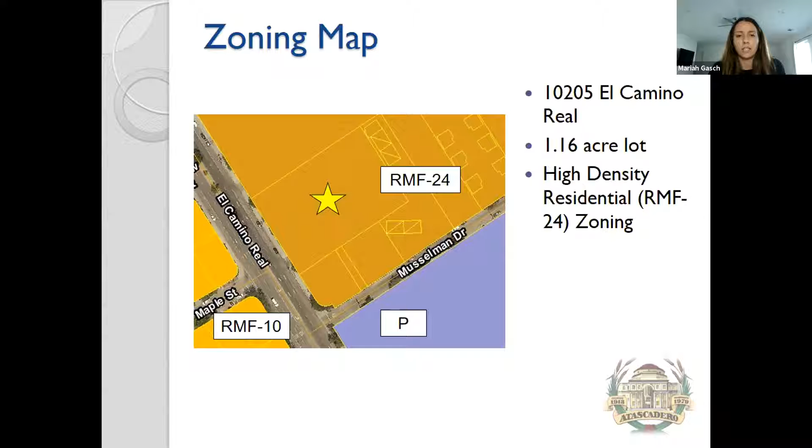Here we have the zoning map. The property is in the residential multifamily 24, or high density residential multifamily zoning district. The property itself is about 1.16 acres, and to the west side along El Camino is the low density multifamily or RMF 10. And then to the south is the public zone, which is actually the state hospital's property, the blue property you see there.

Here's an aerial photo of the site. We'll talk about what's existing in a little bit. You can see that there are 4 existing residential buildings, and then there's 1 community building on that site.

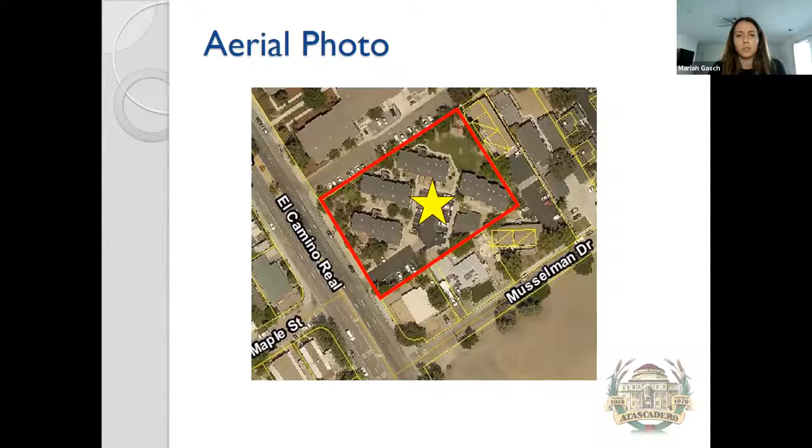So the project, the property has 4 two-story multifamily buildings for a total of 19 units on the property. It also includes an outdoor area as well as a community building that's almost 1,400 square feet. The units are not deed restricted, but they're rented at a low income level.

Some background about the project is that this was presented to the design review committee in February of this year. But the design review committee primarily discussed the parking constraints on site, as well as discussing additional storage to meet the multifamily residential standards, as well as screening requirements on the site.

So the project being proposed is the addition of 1 new 6-unit building. This would include 5 1-bedroom units and 1 2-bedroom unit, bringing the project up to 25 units total. The project also includes the renovation of an existing community room, adding additional community space, as well as some upgraded accessibility, particularly in the parking lot. The new building is going in place of the existing play area, so that will also be relocated.

To talk about density, the project is 100% affordable, so they could potentially get a density bonus. However, the municipal code allows for a maximum density of 28 units on this property, so the 25 units proposed fits within the Atascadero Municipal Code standards. Multifamily projects over 12 units do require a conditional use permit. This project was built prior to conditional use permit requirements, so this is technically their first one, but this will bring it into compliance with the conditional use permit standards.

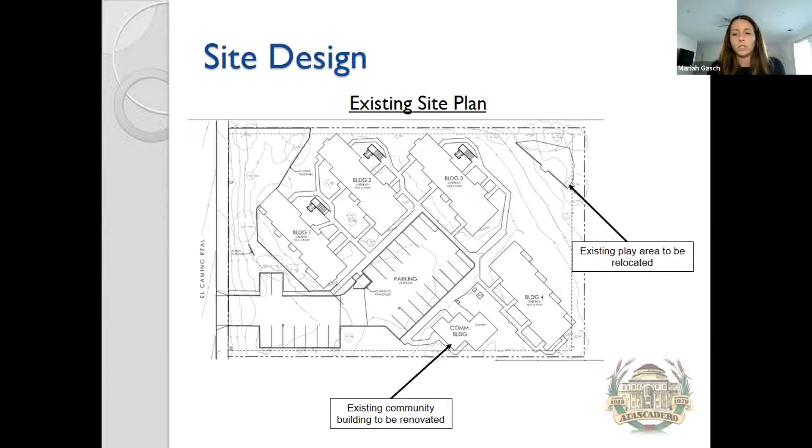So we talked about the concessions and why this project qualifies for those. The applicant can have up to 4 concessions, but they're only requesting 2. The first one is a waiver of development standards related to indoor storage, which we will discuss, as well as the development standards related to landscaping required for the parking lot.

So we'll move on to the architecture and design of the project. The new building and community room expansion are going to be consistent with the existing architectural style and materials of what's there right now. The existing buildings are actually also going to be getting a makeover, and they'll all be painted an earth-toned palette of exterior colors with asphalt shingle roofing. They'll have smooth stucco, vinyl windows, and horizontal siding.

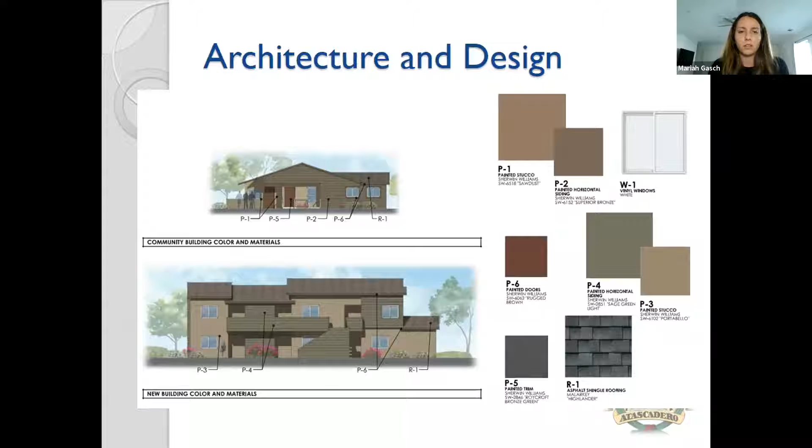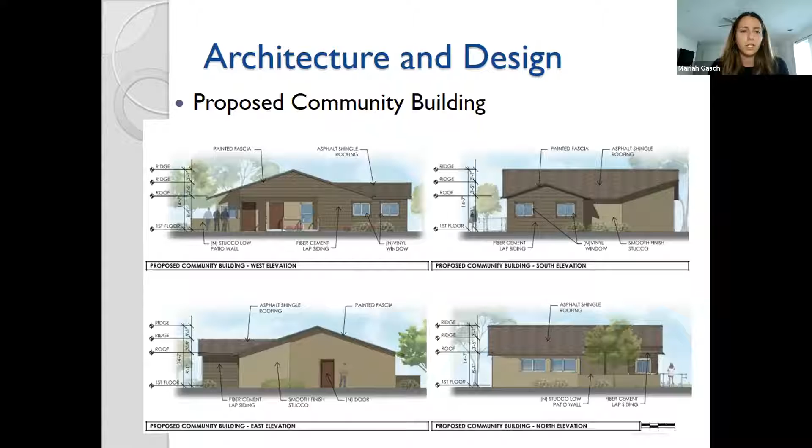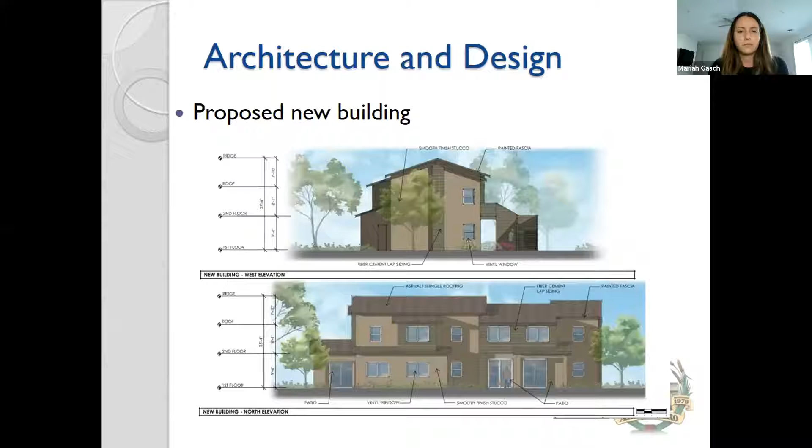So again, here's the community building with the combination of the colors and materials. It's a little over 14.5 feet tall. And here's the new residential building. It's a little under 25.5 feet tall, and it has those same colors and materials as the community building. Here's just a couple other angles of it.

To discuss the parking on site, the existing parking lot only has 25 parking spaces. The concerns about parking were a bigger discussion at the design review committee, so the design review committee requested that at least 32 parking spaces were to be on site total.

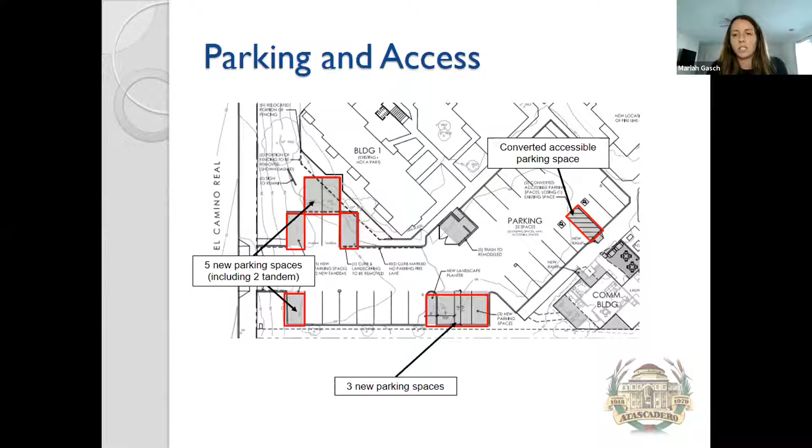So this is what the parking lot is proposed to look like. As you can see, a couple of new spaces were added by adding tandem parking spaces in front of building 1, as well as a new parking space in the front, 3 new parking spaces and a new landscape planter along the bottom there, and then converting a couple of the spaces in front of the community building to accessible spaces.

Moving on to landscaping, approximately 41% of the site will be landscaped, which is well above the minimum 25% that's required for multifamily based on the municipal code standards.

One of the concessions they're requesting is exceptions to parking lot landscaping. The first is that a minimum of 10% of parking areas need to be landscaped, as well as shade trees being provided. We can take a look at the landscape plan, but they do have a few trees along the parking lot, though they don't meet these standards. So that is one of the concessions they'll be requesting. Based on the existing conditions and that the site is built out and already limited on parking, staff is not recommending any changes to the proposed landscape plan for the parking lot.

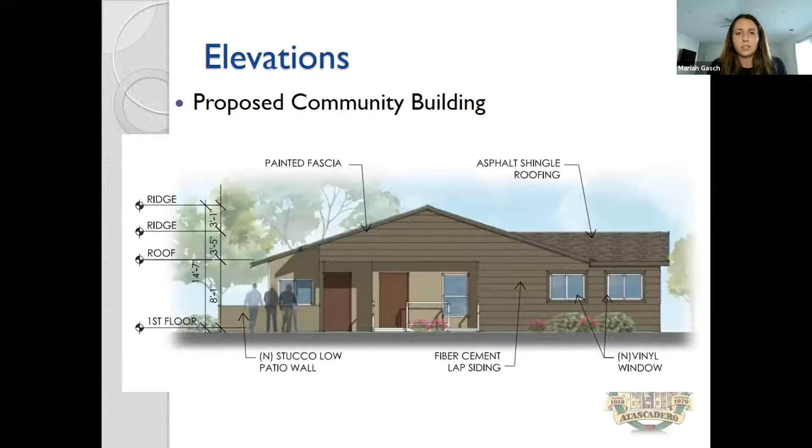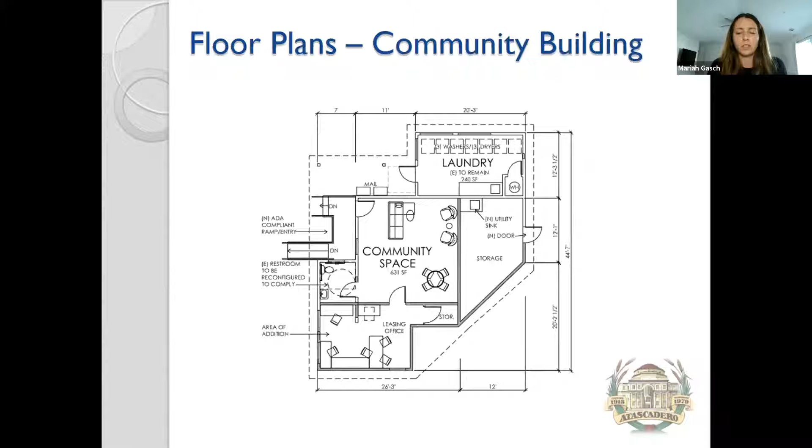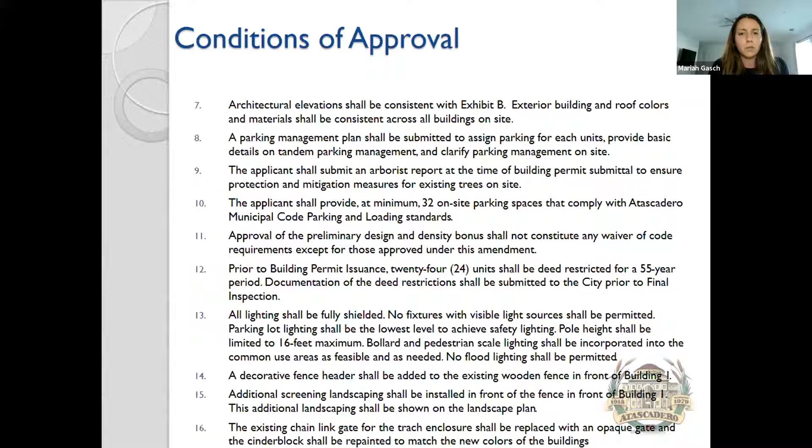So we can go over the conditions of approval. They are in your staff report, but most of them were discussed in the presentation. But if anyone has any questions, we can go over those.

The project qualifies for a Class 32 categorical exemption for construction of an infill development. Staff's recommendation is that the Planning Commission adopt the draft resolution approving the amendments to add 6 new units to an existing 19-unit apartment development, subject to the conditions of approval.

As always, the alternatives for the commission are they may approve modifications to the project, the commission can determine that more information is needed and refer the item back to staff, or the commission may deny the permit. Staff is available for questions.

Thank you, Mariah. Good to see Tori here too.

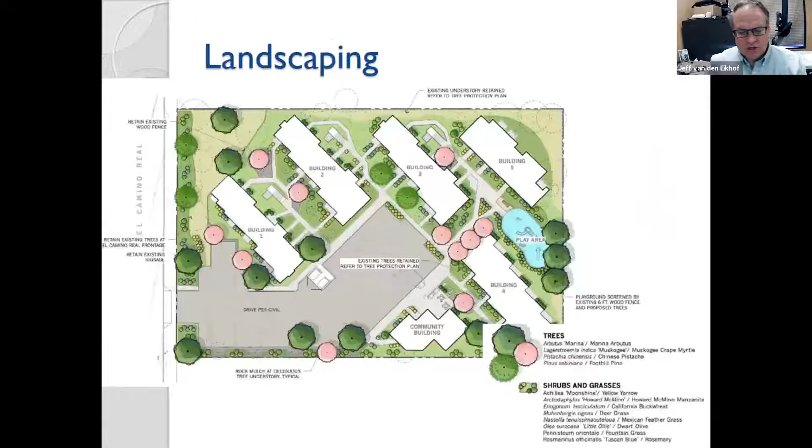Any of the members of the commission have questions of staff? I do. Dennis, go ahead.

Mariah, when was this item heard at the design review committee? This went to the design review committee, I think it was February 11th of this year. And so that is where I heard this presentation before, at that meeting? That would be the only other hearing this went to.

And at that meeting, there was, I think, concerns about parking, about there being enough parking. Because typically what happens with housing, more cars are associated with it than what the code normally allows for. So I thought we expressed some concern about that, and about spill over into the street parking. Is that correct? Yeah, so that was brought up by the design review committee.

The design review committee wanted to see no fewer than 32 parking spaces. So the applicant did go up to that number, but in looking at the state's numbers, the city can't really require any more than even 31. So they're actually 1 parking space over what the state requires.

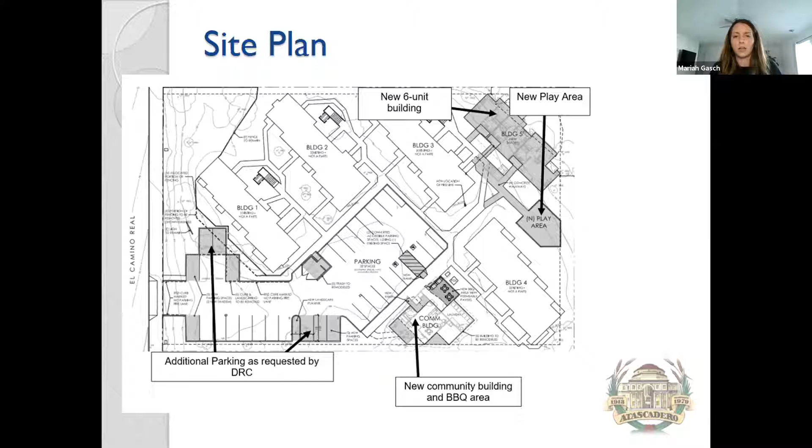As far as adding more impervious area to the project, are they able to offset that increase in the plans that they provided? Yes, I believe that's been taken care of. That's just a standard requirement, and I'm pretty sure our Public Works, Lori Azim, already looked at a preliminary plan, but I think the applicant could probably confirm that. Okay, thank you.

Any other questions of staff? Okay, if not, we're going to open it up to the public. If there's anybody who would like to... actually, why don't we open it. Yeah, we're going to open up the public hearing, and we're going to invite the applicant or the applicant's representative to make their presentation if they have one.

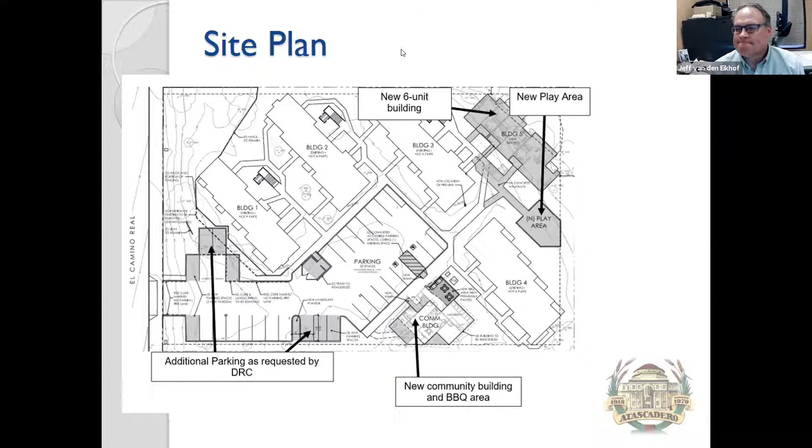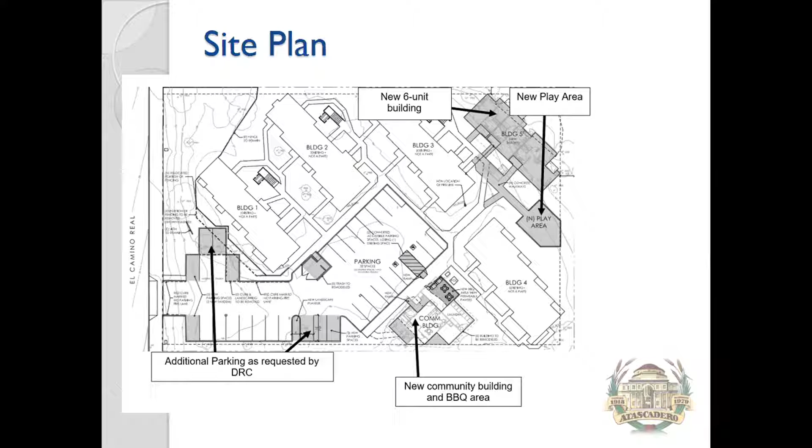Good evening, my name's Scott Smith. Are you able to hear me okay? Yes. Okay, thank you. I'm just going to open up real quickly our presentation, and then I'm going to turn it over to our technical team, RS Architects and Adriana. But my name's Scott Smith, I'm the executive director at Haslo, and I thought I would give you just a little background, additional background on this property, if you weren't aware.

I guess some of the folklore when I came to Haslo about 10 years ago, I was kind of asking about, well, what's this property that Haslo owns? It's just really different than anything else that we own. And part of it, I was looking at, I said, we really need to upgrade some things, we need to do this, we need to do that. Well, I got the stories that apparently this used to be an affordable housing development originally when it was constructed.

And there were a number of those like this around the county, and more than one in Atascadero. But the deed restrictions that were on there were expiring. It was privately owned, an affordable development that was privately owned, and the restrictions were all expiring. So Haslo at the time made the decision that they should do something. So they went out and got a bank loan and they purchased the property. And that's why you have a situation today where we're trying to keep the rents below market because that's our mission, but there's no deed restriction.

At the same time, it's really challenging for us because when it was affordable under the deed restriction, that private owner was getting subsidies, monthly subsidies to keep them affordable. And we don't have any of that right now.

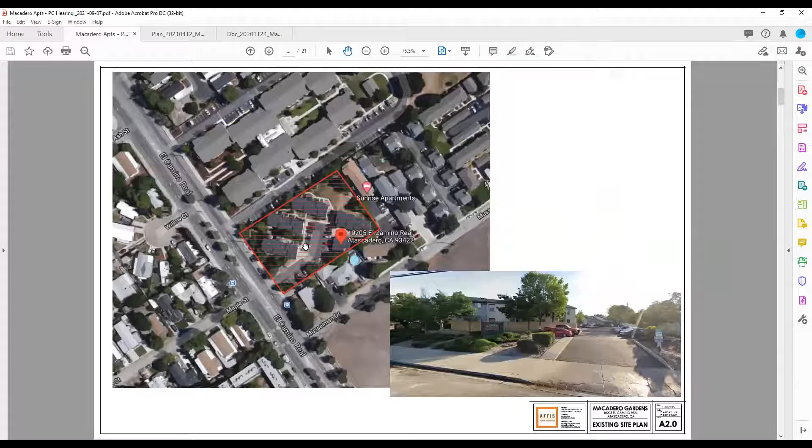Here's our property off of El Camino. These will be 100% affordable for-rent apartments, owned and professionally managed by the Housing Authority of San Luis Obispo, located close to transportation and amenities. We're adding 1 building, 6 units, for a total of 5 apartment buildings and 25 apartment units. This will allow for cosmetic upgrades, exterior and interior, to the existing buildings, including accessibility upgrades.

Per state density bonus law, the city is required to provide 4 incentives or concessions, and we are requesting the following: the reduced indoor storage wasn't feasible for us—we tried a few times—and the reduced parking lot landscaping. As you know, the parking was tight, so we had to do one or the other there.

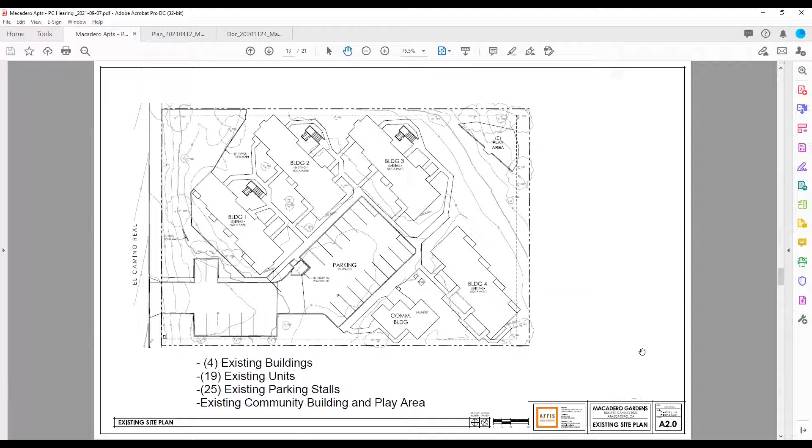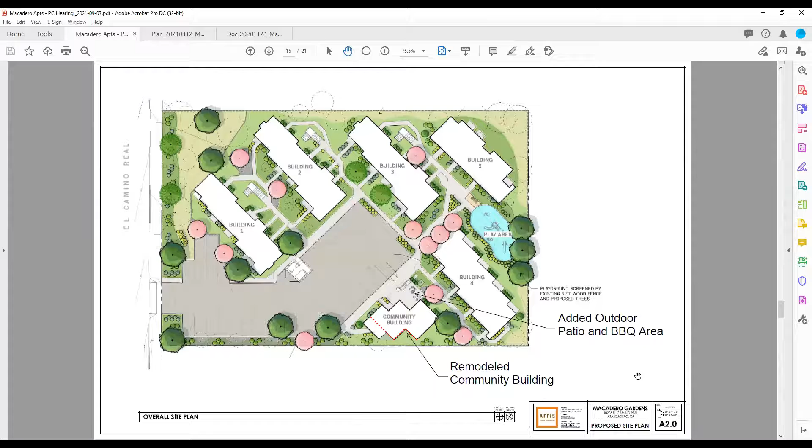So this is the existing site. Our added building is where the old play structure was. We meet rear and side setbacks there, and we've relocated the play area in the teal portion. We've also added the outdoor barbecue area and are proposing to remodel the community building so it can get more use out of tenants.

We're also adding the hatched parking stalls, and this area is altered to make accessible stalls—there are no accessible stalls currently. We were able to squeeze in one landscape planter in the parking lot, but that was about it. We're also proposing to revise the trash enclosure altogether to make that accessible for tenants.

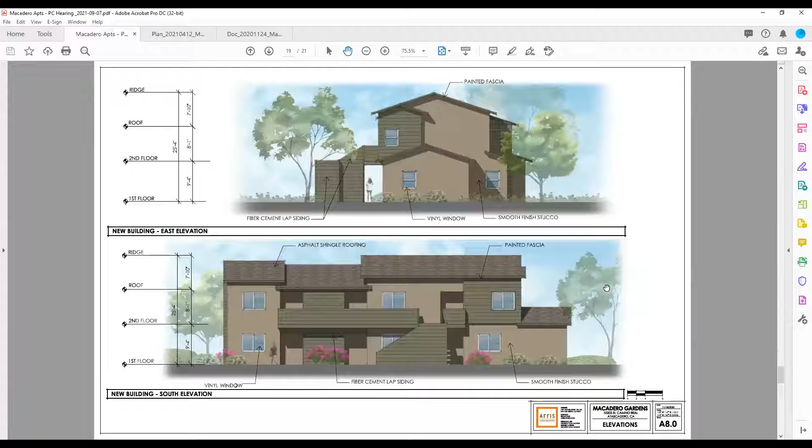All right, I already went over these, and that is our project. I'm available to answer any questions.

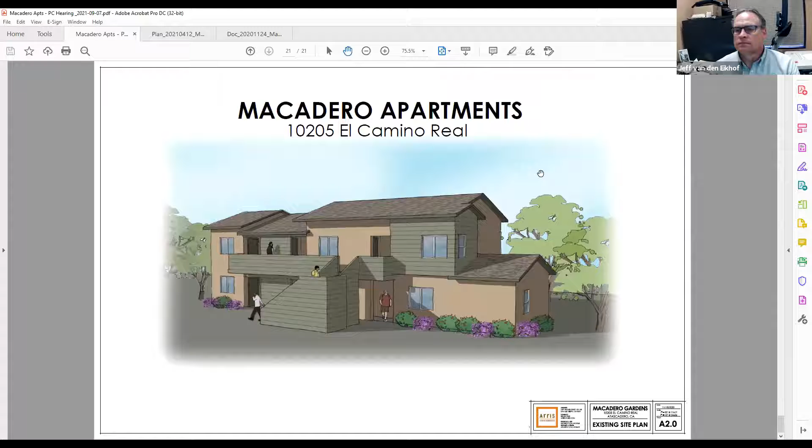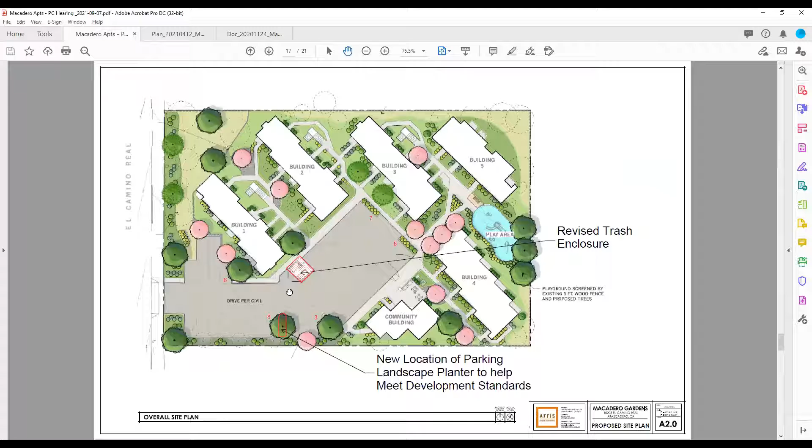Thank you, Adriana. Do we have any questions from the commission for the applicant? I have one—you said the trash enclosure was going to be completely redesigned to provide ADA accessibility, is that correct? Yes. Okay, so I assume that will just be color matched to the new stucco. Yes, and I think the goal by adding this building is to tie all the buildings, the community, and the trash enclosure together.

Okay. Anybody else have any questions of the applicant? Okay, if not, we will open it up to the public.

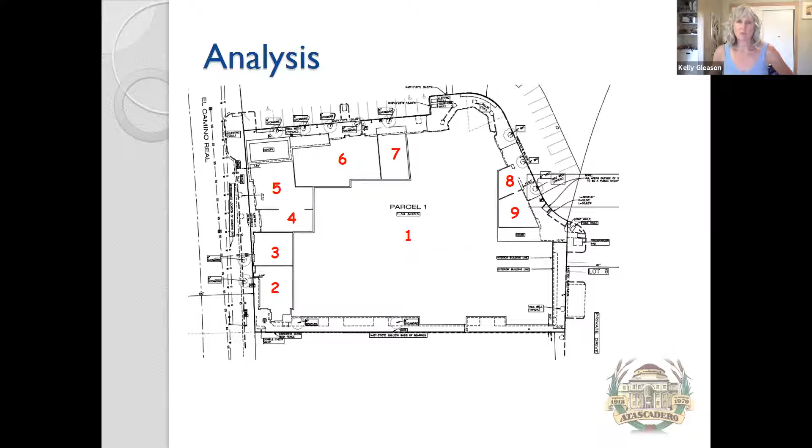This is just a layout of the proposed airspace units. You can see the 9 tenant spaces, with the first space being the theater building and the largest of the proposed airspace units.

The project qualifies for a Class 15 exemption under CEQA, as they're not expanding any use or making physical improvements to the site. There are a number of parcel map findings required to be made, and those are included in the resolution attached to your staff report.

Staff is recommending that the Planning Commission adopt the resolution attached to approve the airspace condominium map for commercial tenant spaces. It says 39, it's just supposed to say 9, that would be a lot. And just one correction, which is also spelled wrong up there, to the applicant's mailing address on the resolution.

As always, the commission has 3 alternatives: you can approve the project with amended or additional conditions, you can continue the hearing if more information is needed, or you can deny the project if you feel the findings cannot be made. That concludes staff's presentation. I believe the applicant is also online with us tonight and can answer any questions you might have.

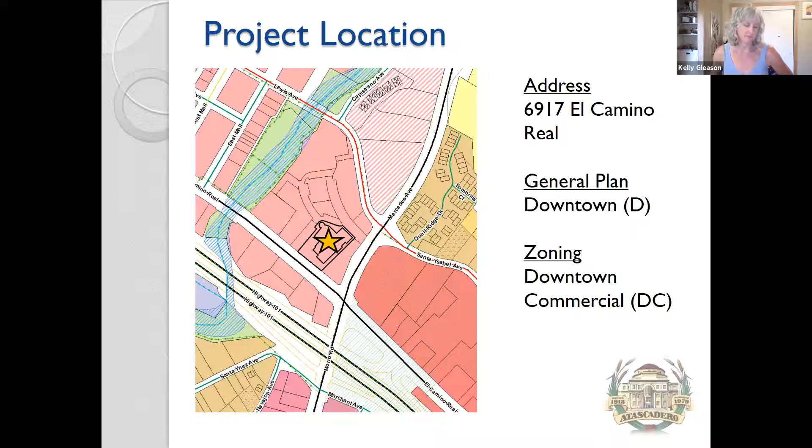So if a sale does occur sometime in the future, that doesn't change any of that fact pattern then? Correct, about utilities. Okay, thank you.

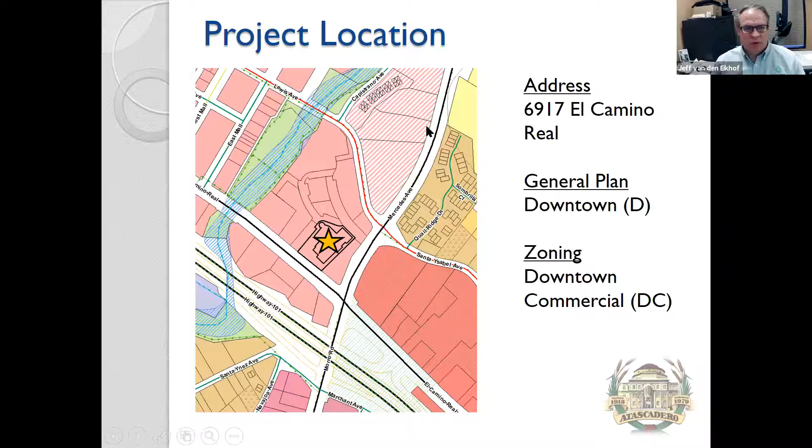Okay, it looks like we have Jeff van den Eikhof. Hello. Hello, Jeff. Hi, thank you for allowing me to speak.

As staff said, COVID hit this property real bad. The theater got closed down by a government order in March. Galaxy Theater has paid almost no rent since then. As fate would have it, their 5-year lease, which would have renewed normally, came up this April. We've been going month to month, and we've got an extension through the end of the year with Galaxy Theater at a lesser rent.

Regrettably, our lender has been the most aggressive lender in the Central Coast, trying to capture this property through foreclosure. It was the only foreclosure of a commercial property in the Central Coast for a long time. We've had several battles to try to stave them off.

There was the day, as fate would have it also, California was opening June 15, and they had a foreclosure sale scheduled that day, which was going to be perfect timing for them - they get the property at the same moment California opens up, and the theater can have 100% occupancy. So we were forced to file a Chapter 11 reorganization the day before, on June 14.